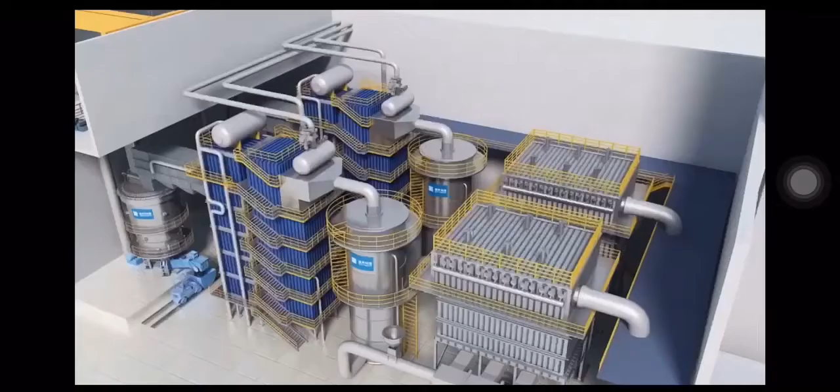There are a number of other new and emerging technologies that are able to produce energy from waste and other fuels without direct combustion, such as gasification. Gasification has the potential to produce more electric power from the same amount of fuel than would be possible by direct combustion.

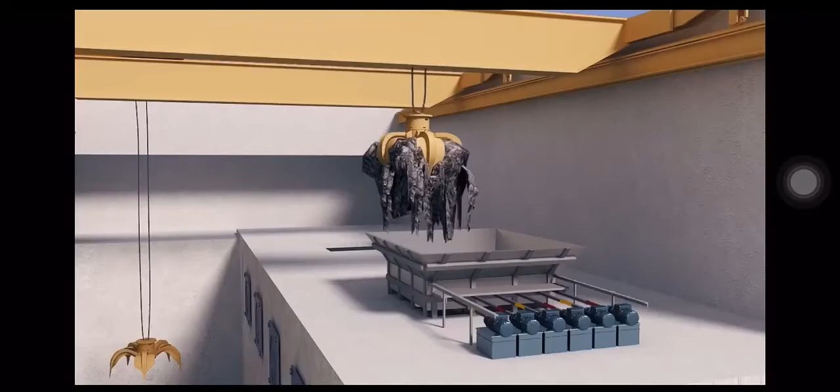The gasification process is a technological process that can convert any carbon-based raw material such as coal into fuel gas, also known as synthesis gas or syngas for short. The gasification process occurs in a gasifier and operates at a very high temperature, of which power can be derived from the combustion and is considered to be a source of renewable energy. The gasification process has been known and used for centuries, for coal as early as the 18th century. The development of technologies for processing residual solid mixed waste has only become a focus of attention in recent years, stimulated by the search for more efficient energy recovery.

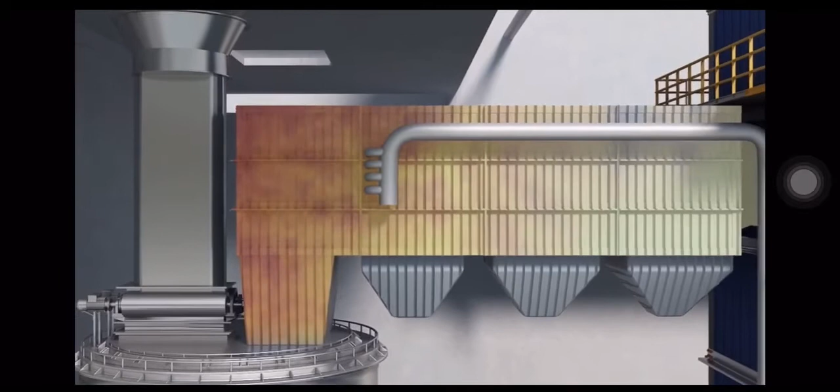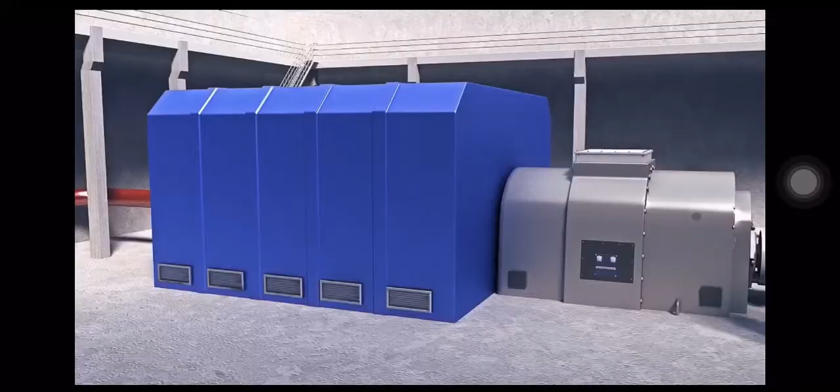The gasification process has a lot of advantages, such as the process is cheaper and more efficient than the steam cycle used in incineration. However, environmental advocates have called gasification incineration in disguise and argue that the technology is still dangerous to air quality and public health. Several waste gasification processes have been proposed, but few have yet been built and tested, and only a handful have been implemented as plants processing real waste, and most of the time in combination with fossil fuels.

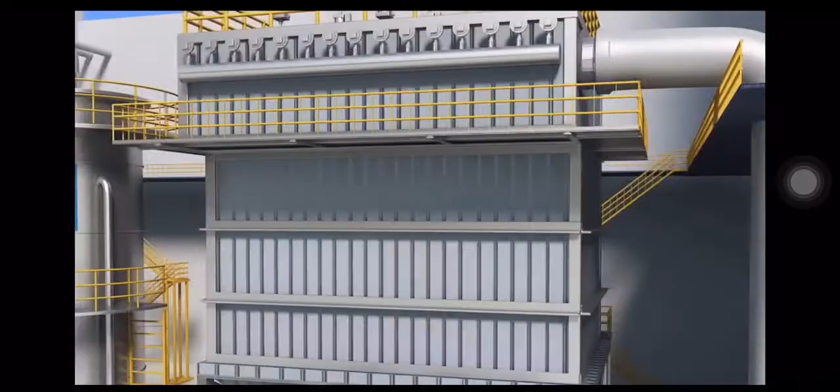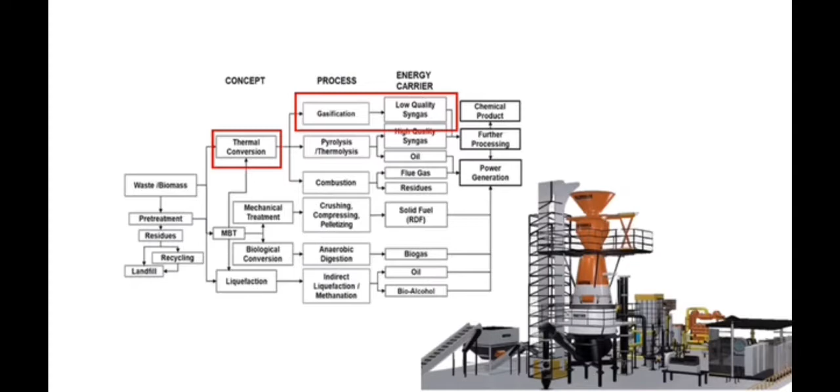The waste contains carbonaceous materials converted into gaseous product at high temperatures with the aid of a gasification agent. The gasification agent, or another gaseous compound such as oxygen and water introduced as steam, will allow the feedstock to be quickly converted into gas, which is called the synthetic gas, syngas, or the producer gas. It mainly contains hydrogen, carbon monoxide, carbon dioxide, and methane. So this syngas can be very useful in many applications, especially in power generation, while at the same time having significant applications for chemistry and biochemistry.

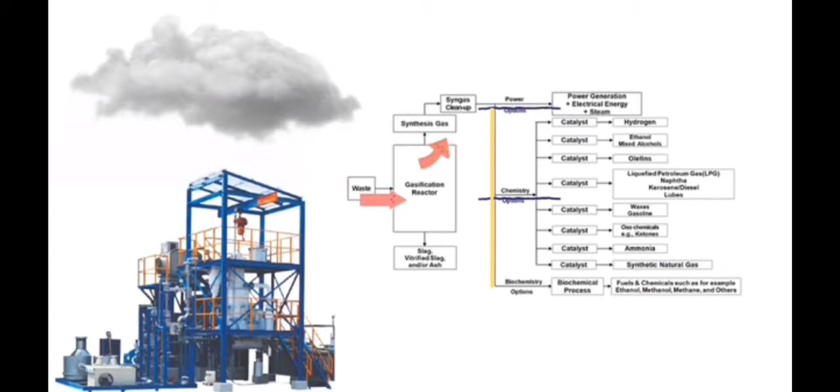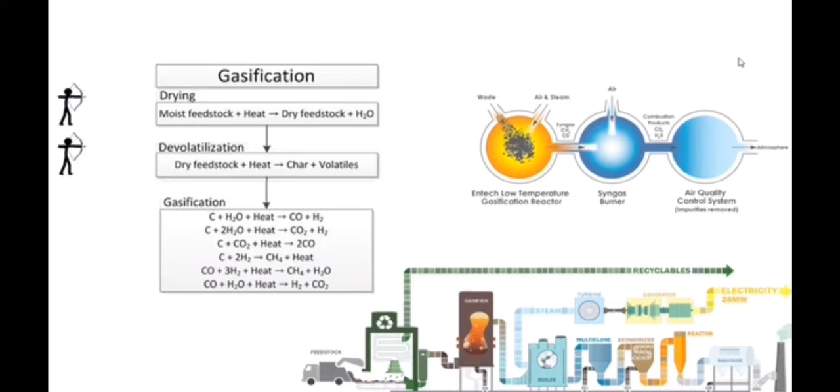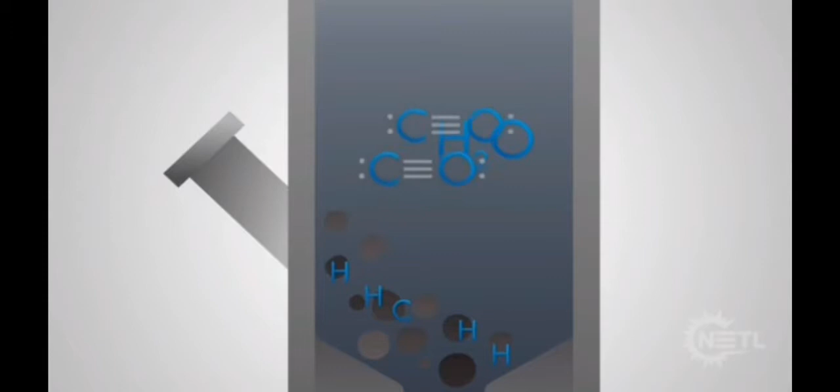So now, let's understand the gasification process. In view of the mechanism, gasification occurs in a closed vessel as compared to combustion. Oxygen and water, present as steam, are added into the vessel. Oxygen chemically reacts with the carbon in the coal to become carbon monoxide. The hydrogen atoms in the coal become hydrogen gas molecules. The water also provides oxygen to chemically react with carbon, leaving the hydrogen behind. This chemical reaction gives off heat, but less than if the coal were completely burned.

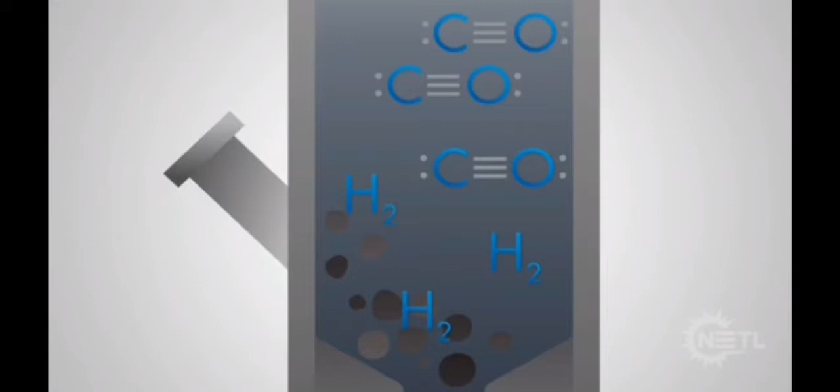Gasification has several advantages on solid waste treatment. It can be categorized into three parts: environment and economically, producing transportation fuels and electricity, and gasification also being a reliable technology.

Environmentally, this process takes place in a low oxygen environment, resulting in higher energy recovery and limiting the formation of pollutants such as NOx and SOx. Gasification is not only beneficial to the environment, but also economically advantageous. Gasification allows the usage of waste product as feedstock, and it can be utilized to turn lower price feedstocks such as pet coke and coal into valuable products like electricity, fuels, and fertilizers.

Moreover, the operating costs of gasification power plants are lower than conventional coal-fired plants and require less pollution control equipment. Next, gasification can produce transportation fuel and electricity. Furthermore, 1 ton of solid waste can produce up to 1000 kilowatts of electricity by gasification. This process offers the cleanest and most efficient means of producing electricity from coal and the lowest cost option for capturing carbon dioxide from power generation.

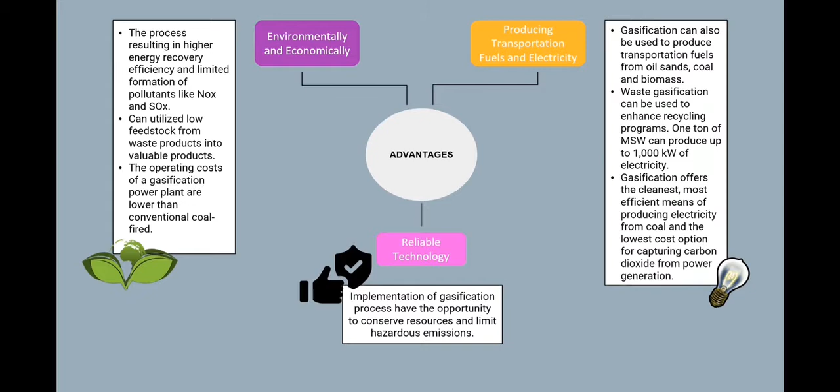Lastly, gasification is a reliable technology. The implementation of the gasification process has the opportunity to conserve resources and limit hazardous emissions.

The disadvantages of gasification: this process has limited feedstock variability, and during the gasification process, tars, heavy metals, halogens, and alkali compounds are released within the product gas and can cause environmental and operational problems. This can result in agglomeration in the gasification vessels, which can lead to clogging of fluidized beds and increased tar formation.

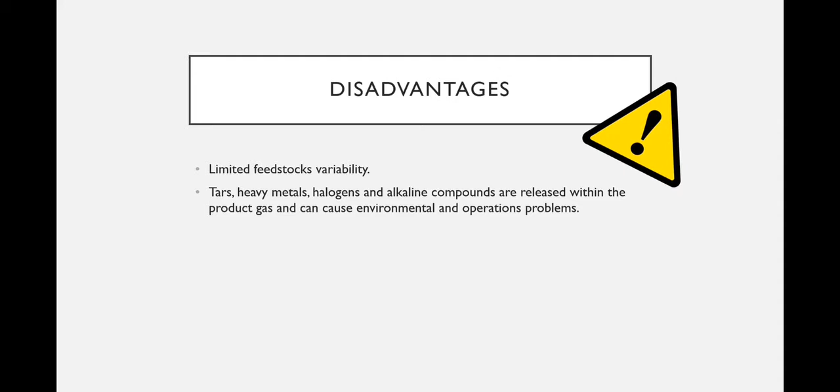The first similarity is that all of the processes are thermochemical reactions which can convert biomass into energy. The second is that the biomass will be heated and evaporated, resulting in a pyrolysis process that produces volatiles.

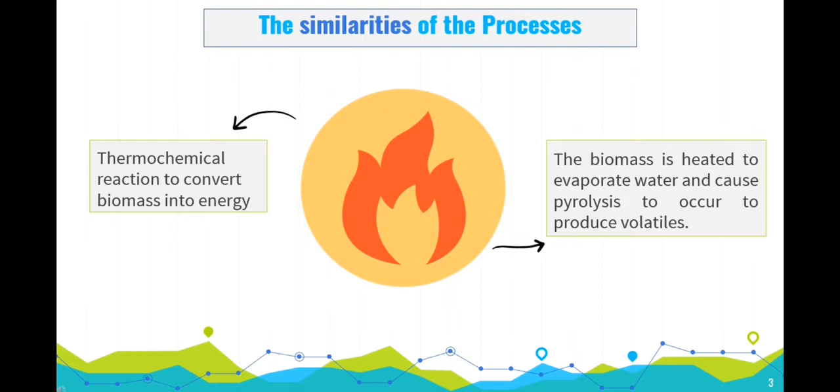Next is the difference between process conditions. For pyrolysis, it occurs in the absence of oxygen, and usually the MSW is heated and converted into gases, oil and char. The operating temperature for this process is 350 to 600 Celsius.

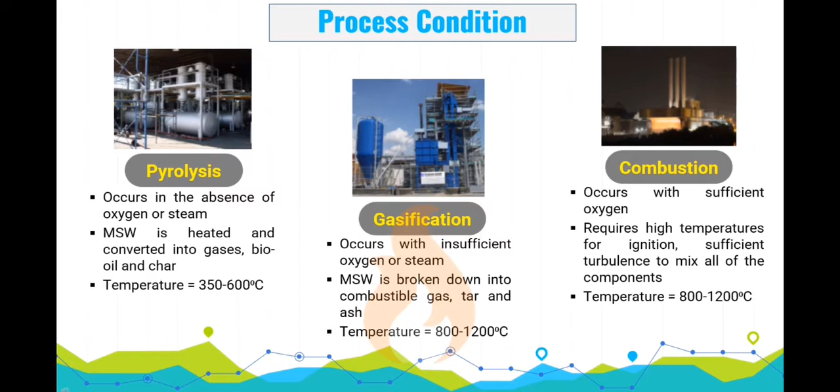For gasification, it occurs with insufficient oxygen, and the MSW will be broken down into combustible gases, tar and ashes. The operating temperature for gasification and combustion is the same, between 800 and 1200 Celsius. The combustion process occurs with sufficient oxygen.

Next is the difference in usage of the processes. First is pyrolysis: the bio-oils generated are usually used as a source of fuel in the combustion process, and the technology used in pyrolysis can be considered new and not widely used.

Next is the gasification process, which generates heat that is used and converted into electrical energy. The technology can be considered mature and still in development.

Lastly is the combustion process, in which the heat produced can be utilized for industrial processes, and it is a well-established and widespread technology.

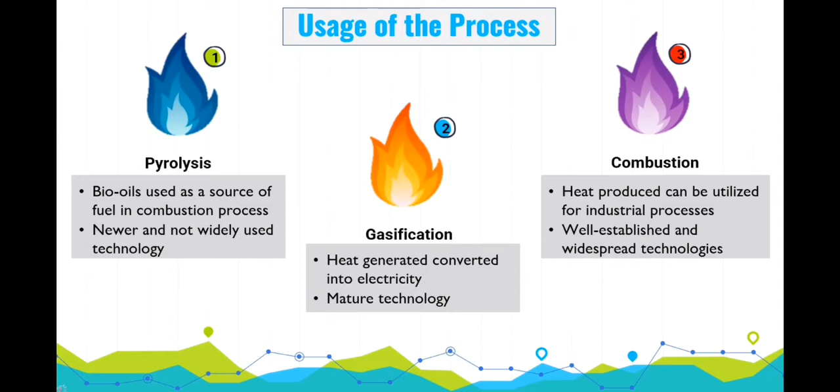Last but not least is the end product of the process. Pyrolysis will generate heat, pyrolysis liquid and gases such as oil and char.

Meanwhile, gasification will generate heat and primary gaseous fuel such as carbon monoxide, carbon dioxide, and other gases such as methane. For combustion, it will generate heat and combustible gases such as carbon dioxide and water.

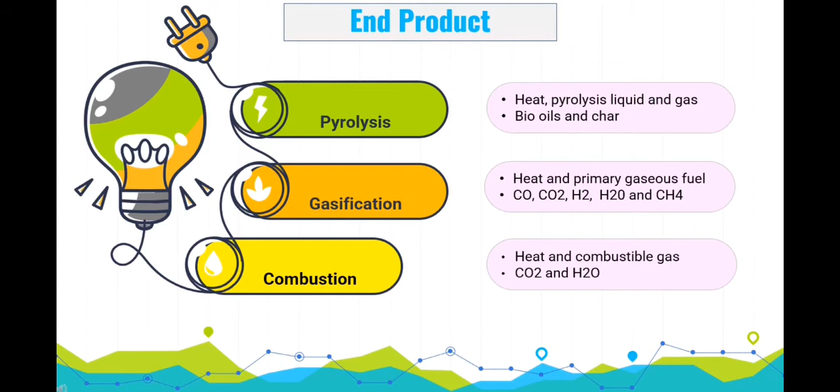I will now talk about the implementation of gasification in municipal solid waste. There are many things that can be produced by applying this method, such as electricity or even biofuel products such as diesel.

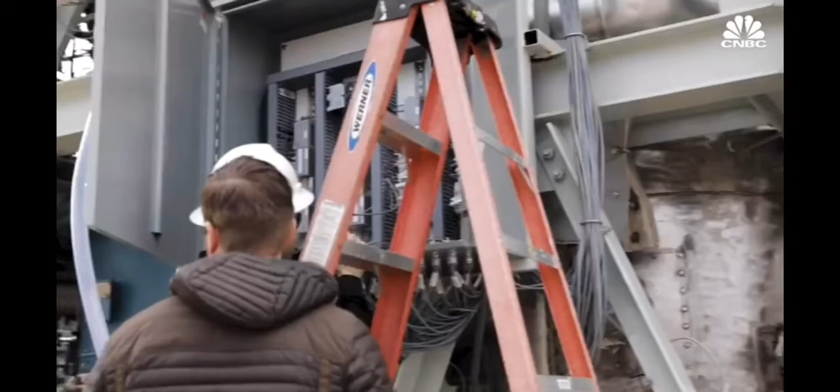For an example of gasification implementation, a company called Sierra Energy produces their own diesel that will be used in a railroad company, as it is their parent company. The CEO thought that by making their own fuel, this would save budget on buying diesel fuel from other companies.

The other products the company produces are electricity, hydrogen gases, and also ammonia. 90% of material can be converted into gases, so the remaining product turns into stone and can be used in construction material.

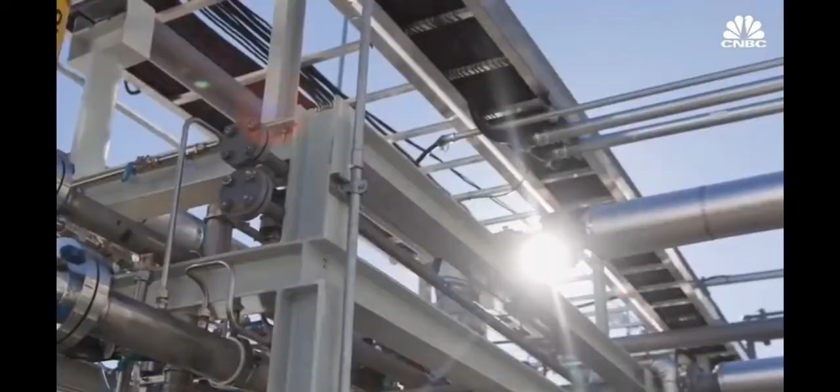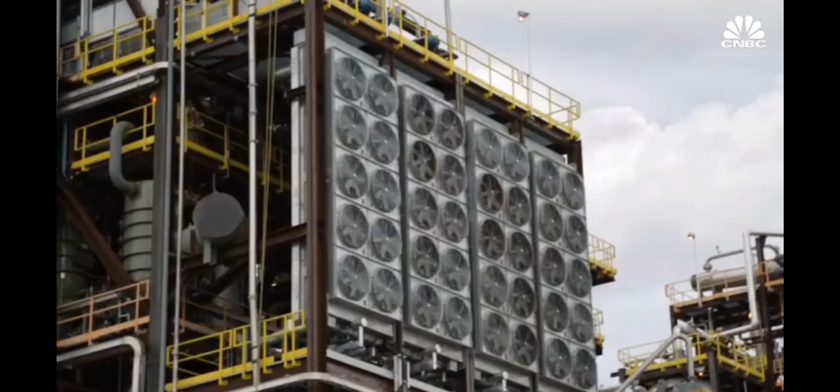Another example is a company called Enerkem, based in Montreal, Canada, which developed the world's first commercial waste-to-biofuel facility. The company currently focuses on turning trash into ethanol biofuel and chemical methanol.

Another company called Klean Industries uses the gasification method. They focus on generating electricity from the syngas obtained from the fluidized bed gasifier. The electricity produced can generate over 36 megawatts of power.

From gasification, they can also produce fly ash that can later be used in construction material as an aggregate substitute. The fly ash can also be recycled into construction materials such as concrete products from the bag filter or electrostatic precipitator.